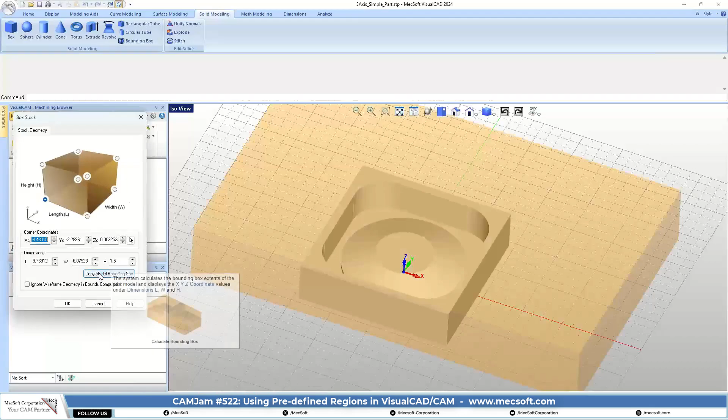Okay, so we're going to leave that there. We'll do a stock box setup, and we're going to copy right to the shape of the part. We're also not going to need to align, since our stock is the exact size of the part, so we don't need to do that.

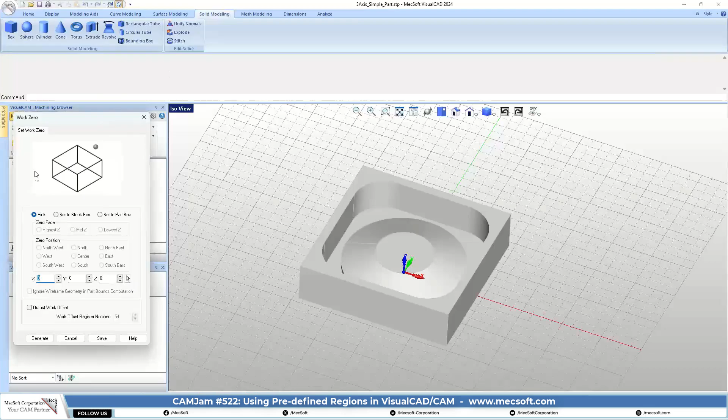So let's go ahead and set a work 0. We'll set that to the stock box, and we may want to do it at the lowest Z, say in the southwest corner. Generate that, so now we have a work 0.

And now we're just going to do some 3-axis horizontal roughing. So we're not going to select anything. Well actually, let's do one other thing. Let's go ahead and create some regions that may help us go a little bit faster. I want to create some regions just on these flat areas. So let's check the filter - currently we'll leave that off for now, and we'll just do a flat area region.

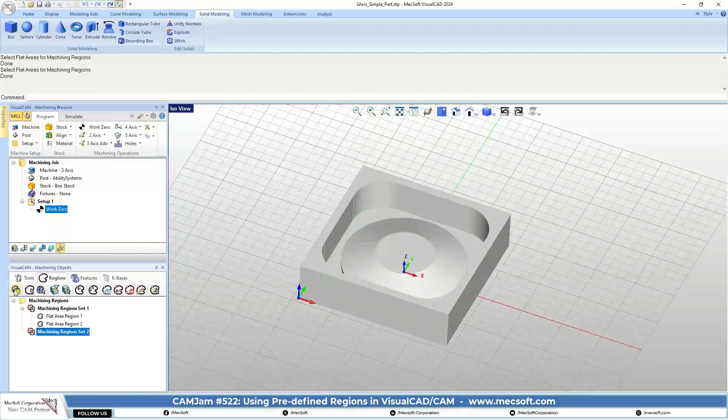Okay, so I got 2 regions there that I can use. And then also, let's create another set, and we'll do another flat area region at the top. Okay, so now we've got these regions that we can work with. We don't have to go select any geometry.

So let's go back up here. We'll go ahead and do some 3-axis horizontal roughing. For the regions, we'll select our predefined regions that we created. Let's see what we got to work with. So we want to constrain the roughing just to pocket right here. So that's good, we'll leave it there.

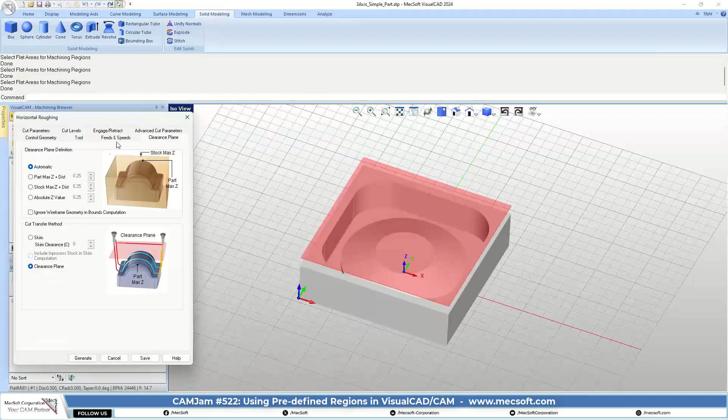Tool - flat end mill, and we'll just save that as a new tool. Speeds, clearance, cut parameters - that's fine, everything looks fine. Cut levels, all that looks good. You may want to do a clear flat so that you get that material out flat on the bottom. And I think that tool is going to be too big, so let's make another tool.

Flat area, flat end mill. Let's go to a 1/4-inch diameter. Okay, change the name, save that as a new tool. Exit. So we're going to use the flat end mill.

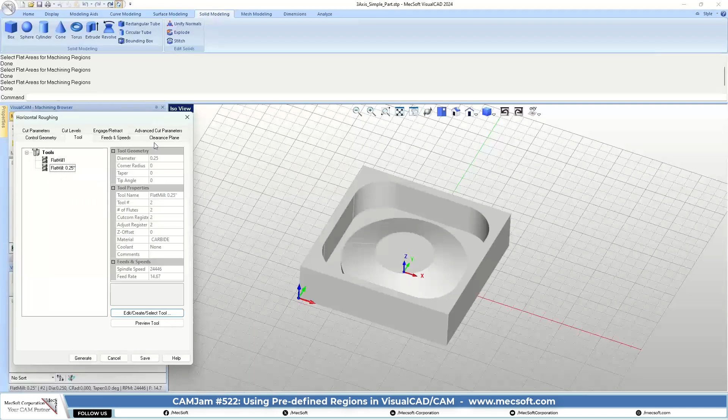Do some advanced - we don't need to do anything. Let's just generate that. So let's look at it - we did some roughing inside, so let's simulate that real quick. Okay, so we got some roughing.

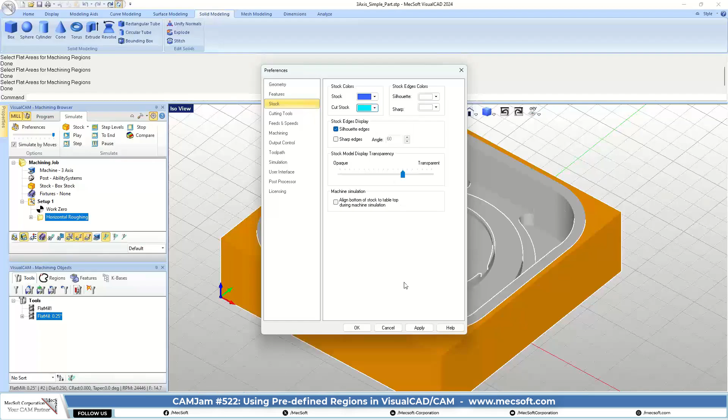Let's change the colors a little bit. I like it so my eyes can see it real good. Okay, so this is the stock color and this is the cut material color.

Okay, so let's go ahead and do some pocketing. Let's do 2-axis pocketing. We're probably going to want to use these 2 regions here.

Okay, the tool - I think we're going to need a smaller tool. So we're going to do a 1/8 inch tool. Okay, save that as a new tool.

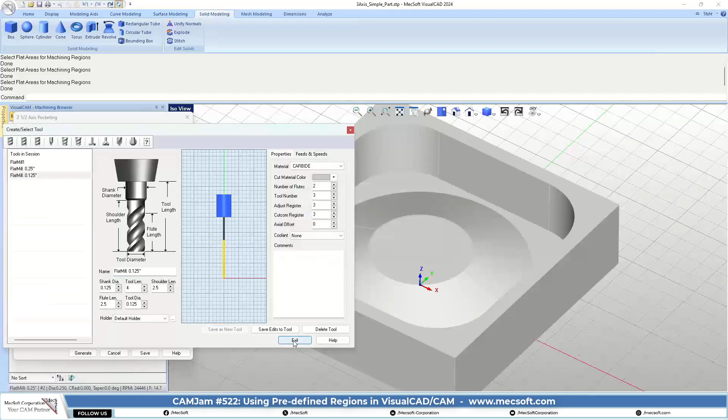No, I think it was at top. The geometry was at top. Remember, you picked it at the top. No, it's at the bottom. Oh, I'm sorry, no problem.

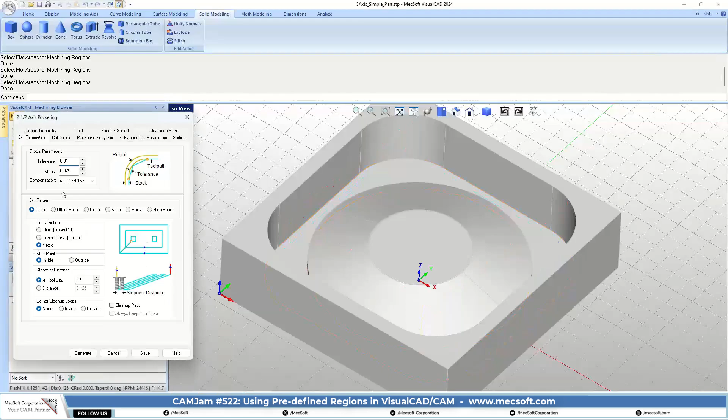So that cut levels at bottom. I think let's just generate that, look at it. So you see, we got a pocket there at the bottom. Let's go ahead, let's double check this. Okay, I wanted a 0 stock. Tighten that up.